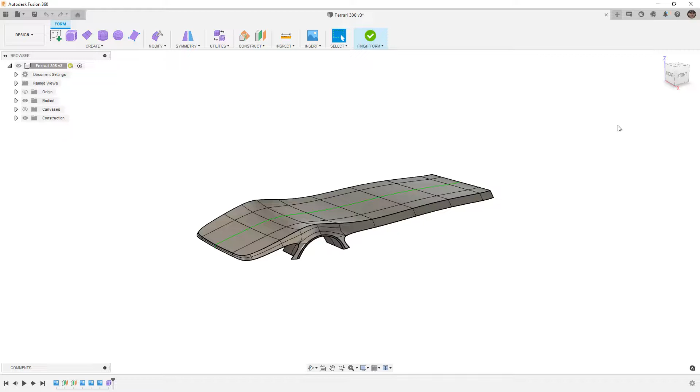What we're going to do is continue to build out the front quarter panel. So we want to connect the bottom edge that we have here and begin moving it forward, and we want to do the same and begin working our way backward. So the way that I'm going to do this is I'm going to start by selecting this edge, and we can consider a couple different things. We can try to bridge these two edges together, or we can begin extruding and pulling this out and manually controlling the shape. Either option is fine.

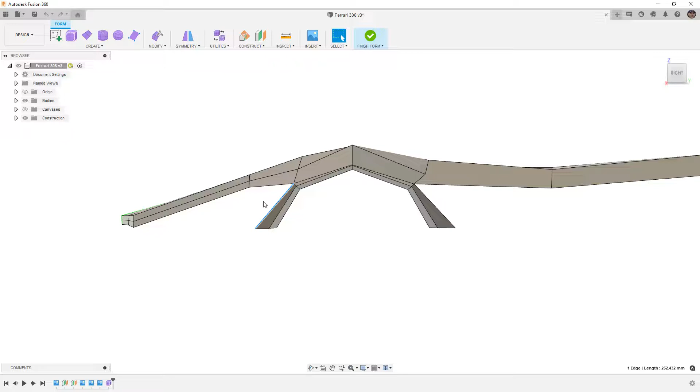When I'm modeling something like this, again, I try to stay in box display mode, and I try to work manually. It's not always the fastest method, but I like to use things like extruding these edges to manually control where they're going to go. So I'm going to bring the canvas back. I'm going to hold down Alt because I want to have a smooth transition. And then I want to take this lower vertex and pull it back.

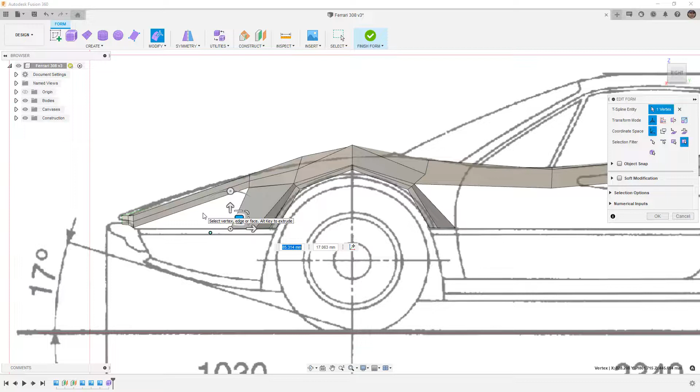What I'm doing is I'm slowly taking the angle of this edge and I'm transitioning it to be more vertical. I don't want to carry that sort of weird tweaked square shape or that polygon. I want to try to get more to four-sided consistent patches. So now that I have this one here, I have to decide whether or not this section is going to be a triangle or if this section is somehow going to be a four-sided patch and carry along the front. Because we know four-sided patches are ideal, I'm going to try to do that.

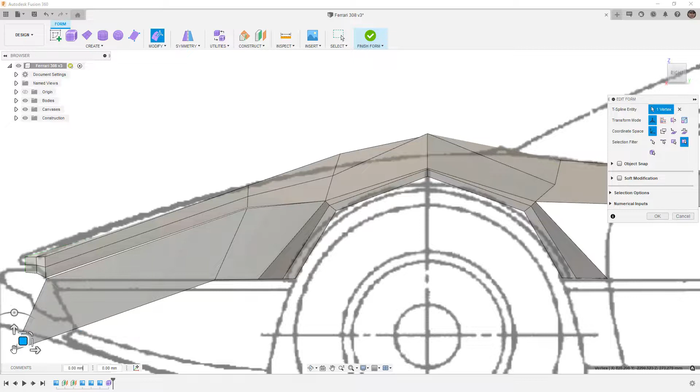So I'm going to just carry this one down. And again, I'm going to take this vertex and sort of bring it up, keeping in mind that we have crossed this midline, but we're going to move some stuff in a little bit. Now that I have that created, I'm going to go to Weld Vertices, and I'm going to put these two together, which automatically merges that edge for me. Then I'm going to do the same thing here.

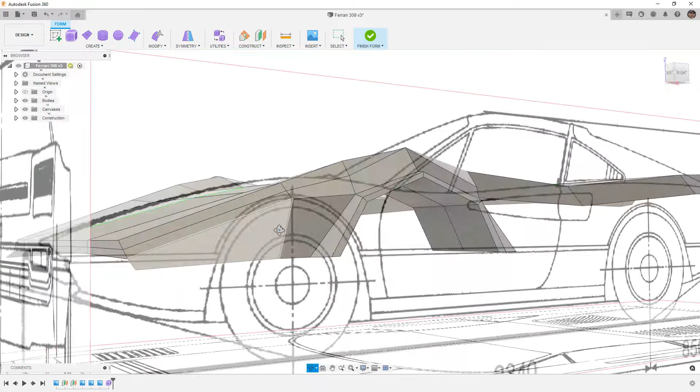So now that I've sort of put those together, let's go into Smooth Display and just see what it looks like. I'm going to hide my canvases, and I want to take a look at the shape. When we look at it from the front, this corner is obviously sort of flared out, but the actual shape of the fender, the transition, looks pretty good. So the next thing that I want to do is go back to box display, and I want to carry this section over to the middle.

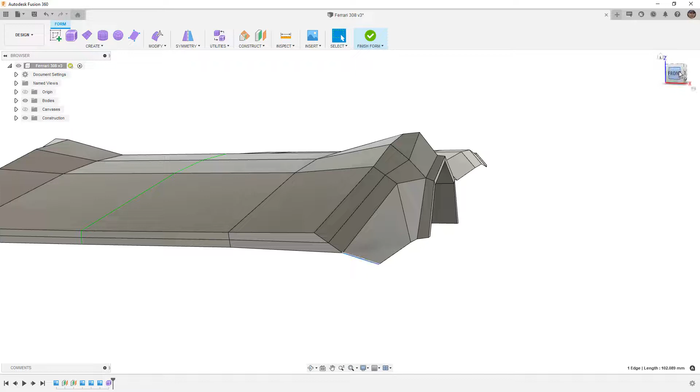Remember when we're working in the form tools in Fusion 360, it doesn't necessarily mean that we have to do everything in here. Now, honestly, doing everything in here is more complicated than it's worth. There are tools in the surfacing environment that are a little bit easier. So I'm going to just sort of move some of these vertices around from the front. Again, just looking for a consistent patch. Keeping in mind that this edge being sort of tweaked out like that is not what I want.

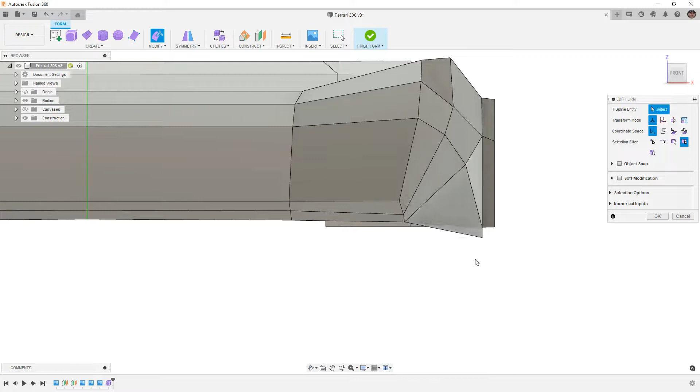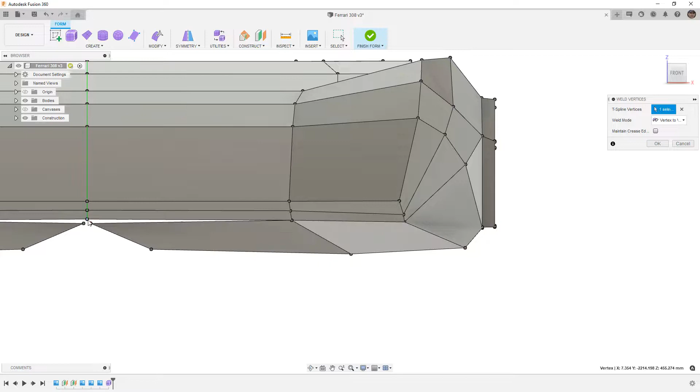So I'm going to bring this over. And then before I really do too much, I'm going to bring this one down a little bit. And I'm going to use Alt, and I'm going to begin just extruding it out. I'm going to let go of Alt and do it one more time and bring that over. So obviously some changes have to be made, but let's go ahead and go to Weld Vertices and let's just put some of these together. So I'm going to go from here to here. It's going to merge those two, and then I can merge these two together across my mirror line. And I can go back to Modify and Edit Form.

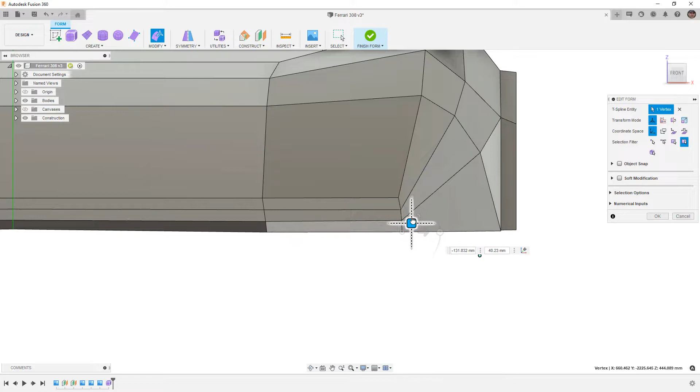As y'all are watching this, you also might wonder why I don't use hotkeys. Now, there are a lot of hotkeys that you can set up and that you can use in Fusion. Generally, I leave my menus exactly as they are default, and I try to avoid using hotkeys on topics where we're really doing a lot of explanation. And the reason for that is because I find it a lot harder to follow along when a lot of hotkeys are used. And when the hotkeys are used, a lot of beginner users or newer users lose sight of what they're actually trying to do.

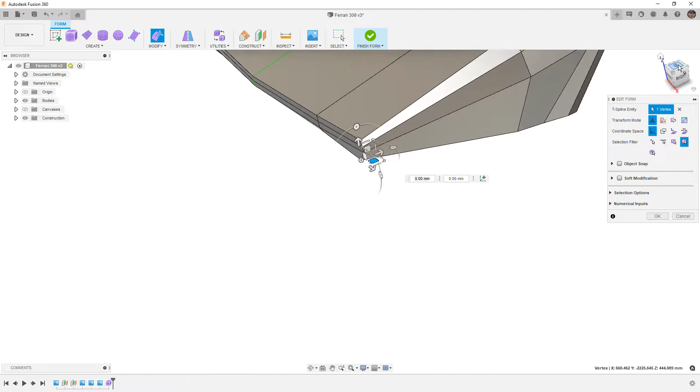So they end up trying to scramble to figure out what was pressed or what happened. And instead of actually figuring out what we're trying to learn, they spend more time just trying to figure out the interface. So sticking to a couple tools like Edit Form and Weld Vertices, and then really just focusing on where those are rather than spending a lot of time working on hotkeys.

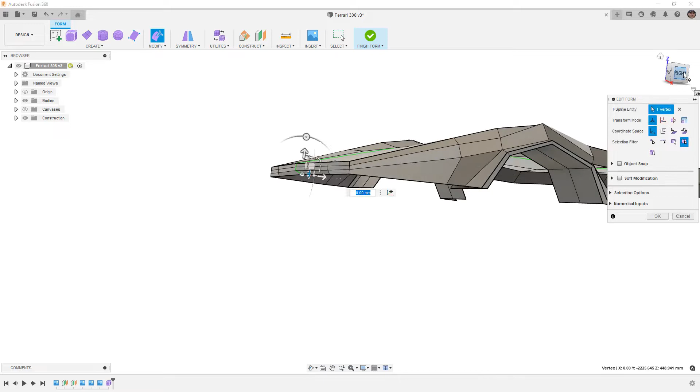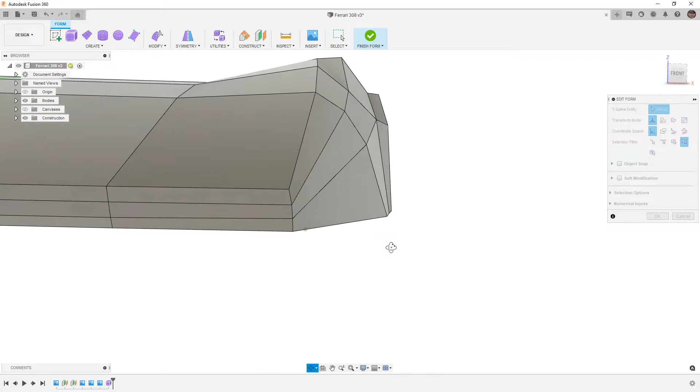And also, in my professional life, I produce videos and tutorials for the software companies. So a lot of times I'm required to keep things exactly as it is installed. So default install, with the exception of things like I can change how the mouse wheel and how the rotate works. But because of that, my 3D mouse is in a closet, and I tend to keep everything as default as installed. So a lot of people do like to use quick keys, especially on other softwares, but at least for Fusion, I'm going to just stick with all the defaults.

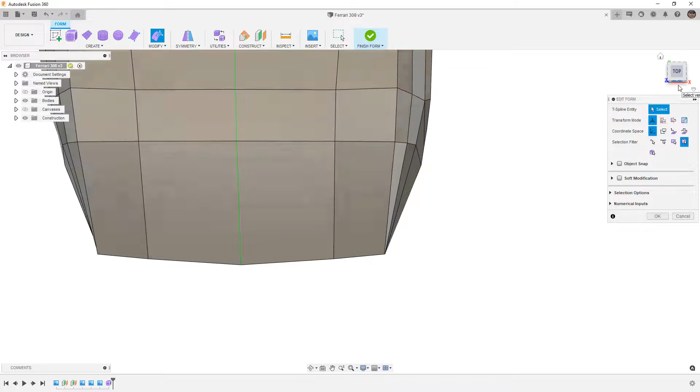So as I was mentioning, I was still kind of tweaking everything, and sort of the general plan is to make sure that everything is nice and consistent. And I don't really like how many edges are here up front. It makes it a little bit more difficult to control the curvature. We can potentially create some T-points here, but for right now, I think it looks okay.

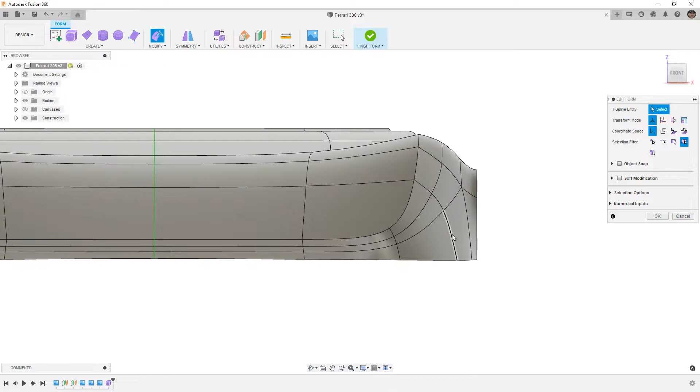And when we go into a smooth display, what we're really looking at is whether or not we're capturing the shape of the Ferrari. So from the front, that looks pretty good. And we managed to keep four-sided patches. Now, there is a topic that does come up when you're doing this type of modeling, and that's figuring out the direction of these patches and how that's going to control the shape that you're working on.

So obviously, we started in the middle and we simply worked our way back. That was a defining characteristic of the car. And we have our fender, which is a wheel arch or an opening for the wheel, and that is a defining characteristic. And blending those two together is often the biggest challenge that you'll have when you're trying to model a car, because you have to go from the front of the car and wrap it around the side, and ideally you would carry the shape all the way back.

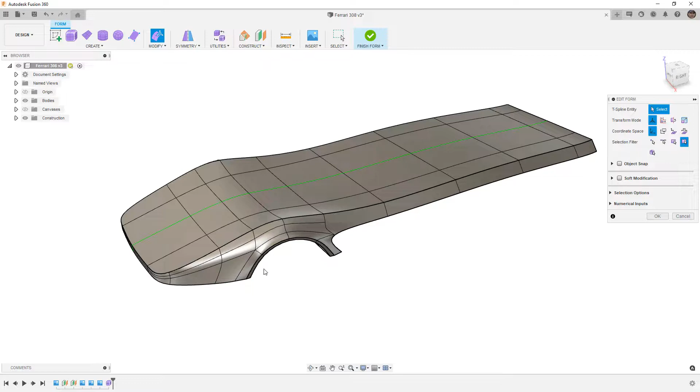Now, there is a modeling approach that we could use where we just make the underlying body shape and we make the fender well shape, and then using our surfacing tools combine them together. And honestly, that would give us probably a closer representation to the car. But the point of this is to learn the Fusion form tools. It's not to get necessarily the best result, but to learn how to use the tools. So I'm sort of designing myself into a corner by doing it this way, but I think it's important for people to learn.

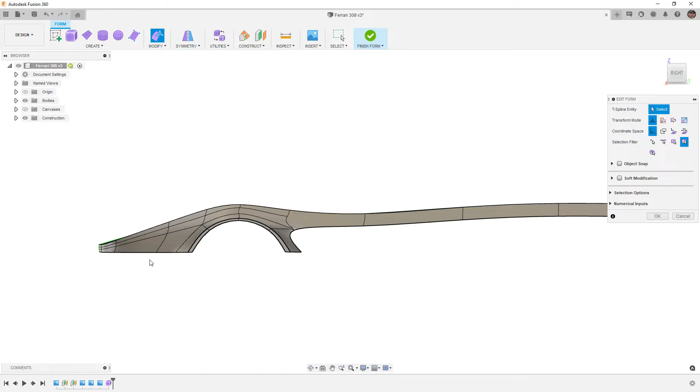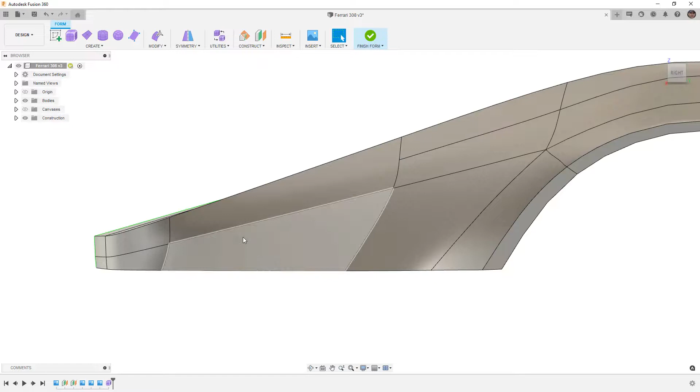Now, as we're looking at the control up here, as I mentioned, it's too many edges. We don't want to control that many. Because we really need the control for the fender just right here, I can likely get rid of these edges. I can select them and hit delete. And because of that T-point, the surface underneath is still pretty good. So it gives me enough control where I don't really have to worry about multiple edges competing for curvature.

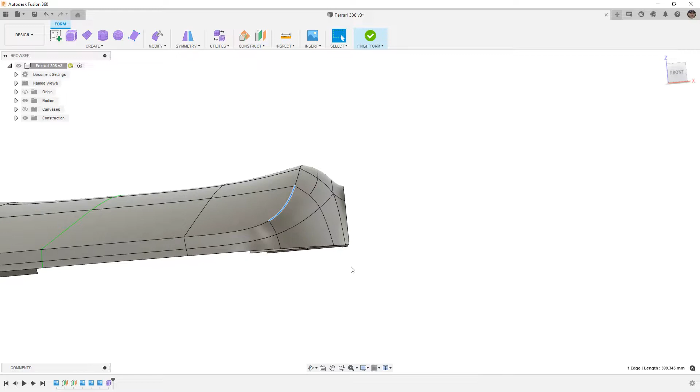Now, as soon as I uncrease that edge, all bets are off, because then the surface up top is going to start pulling, and that surface likely is going to get a whole lot worse. But for right now, if we turn off the edges, the surface quality there with that T-point is really good, and the transition of the fender flare is pretty good.

So I want to be mindful. I want to try to make shorter videos. So I'm not going to carry on modeling too much here, but I do want to focus a little bit more on the fender flare. And the way that this flares on the actual car is down here at the bottom, it pretty much disappears, but there's a very apparent flare up here.

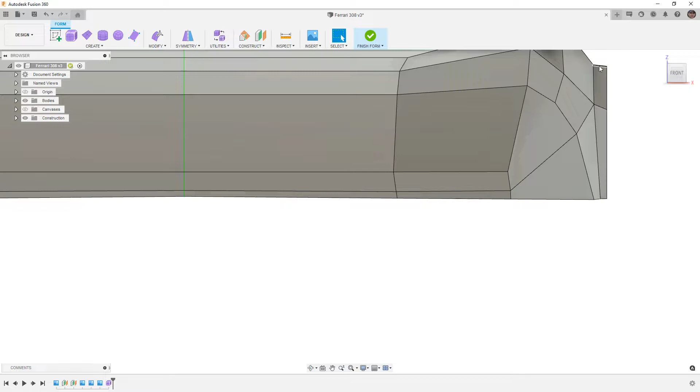And the way for us to make that happen is to take a look at the vertex location and try to make this a straight line. And we can do this manually, or we can try to use a tool. So in Modify, we've got the Straighten tool. We can select these three vertices and make a straight line between them, and that'll help us blend that out.

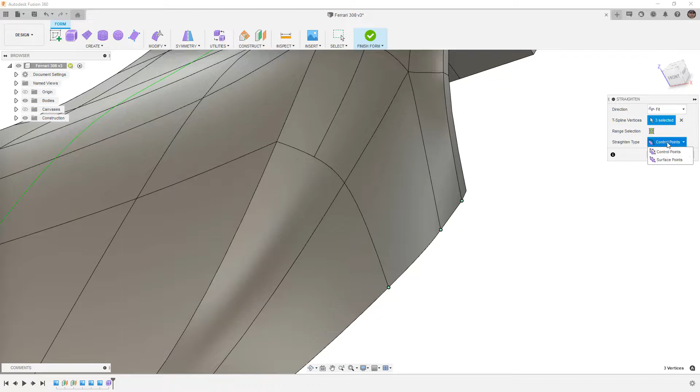Now, it's important to note that we're straightening the control points. And if we take a look at the smooth display, those are going to be the surface points. So there is a difference there between control points and surface points. So make sure that you are using the correct one.

Another thing to mention, and I'm going to repeat that tool using my right-click marking menu, is you'll notice that we have these handles here. Now, these handles are only going to show up on open edges or edges with creases. So you can see here where we've got our crease, we've got these handles. These actually will allow us to manipulate the direction of curvature. So it's kind of a tricky topic, and it's something that's a bit more advanced. And I don't really want to get too much into it.

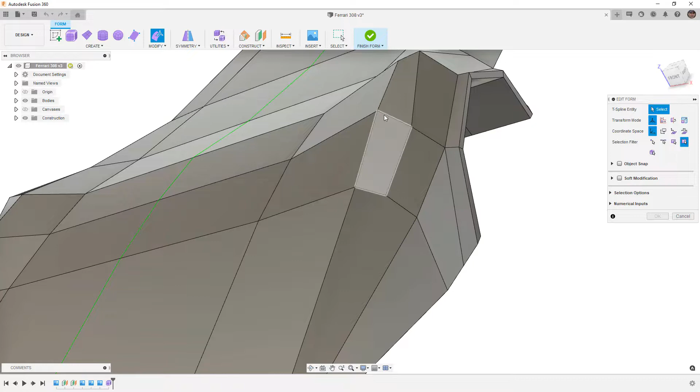But just note that if you see those handles pop up, if you're modifying an edge or a vertex, then if you modify these, so for example, if I pull this out, what I'm actually doing in the smooth display is I'm changing the direction of curvature. So if I use Control Z and bring that back, you can see that's the direction the fender wants to go.

But if I move it up in smooth display, we're not going to see it in box display, but if I move it up in smooth display, I can get pretty close to tangent with that, even though I have a creased edge here. Now, one thing you'll notice after you select that is this link tangent handle pops up. If we click on that, it'll go back to tangent, which means that the curvature that is controlling the shape of this fender is going to start influencing where that handle is.

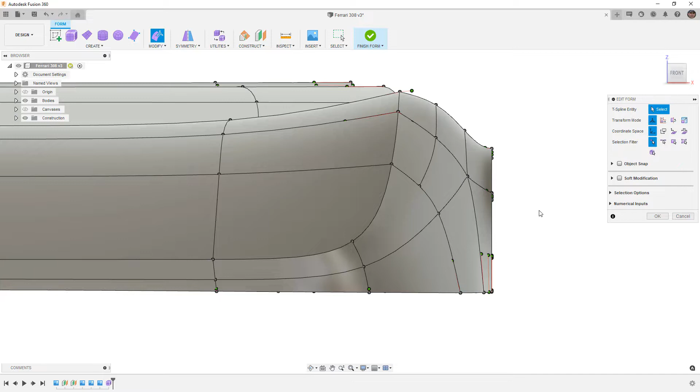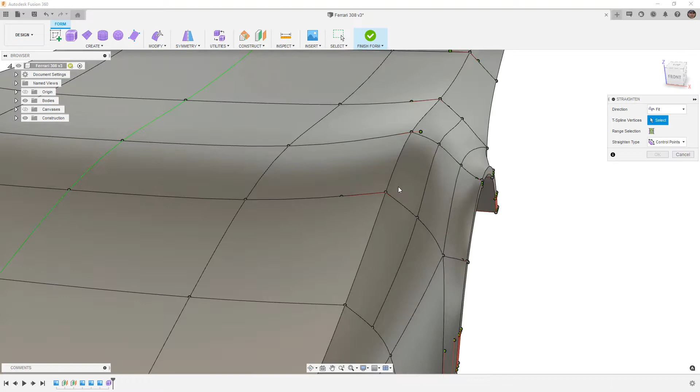So it's just something that you need to be aware of, and it really only shows up if you're on vertex selection. If you use the all selection, you won't see it there. And if you're on face or edge, you won't see it either. So it does pop up a couple times for things like straighten. It can be very handy for straighten if you go into that tool and you want to straighten this vertex, this one, and then the little point on the end. Sometimes it's hiding behind the surface. It can be hard to find. But sometimes you can use straighten to actually help control the curvature, even though we have a crease there.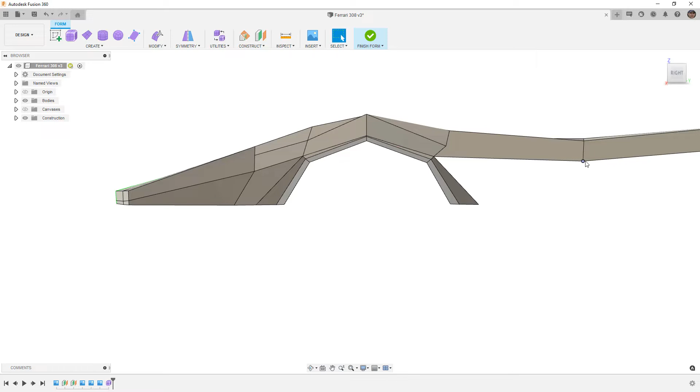So again, that's the reason that I wanted to mention that and try to talk about how to blend the fender flare out. And before we go, let's make just a few more modifications. I really want to carry this edge to the back here. So I'm going to use Modify Edit Form again, hold down Alt, bring it back, and I'm going to pull this one back. If we want to, we can show the canvas again to try to stick to that body line.

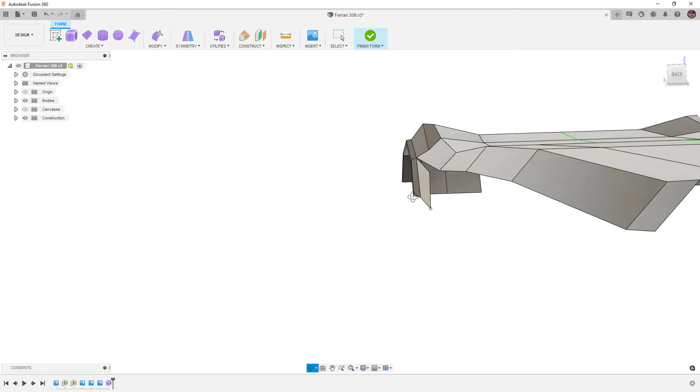And really what I'm trying to do here when I pull these edges out is I want to make sure that, one, they're in the right direction. So I'm pulling it back. I'm always using either a single direction or a planar. And then when I use things like Modify Weld Vertices, I select the one I want to move first and the one I want to go to second to pull that in. So now if we go to our smooth display, we're beginning to carry that smooth body line back.

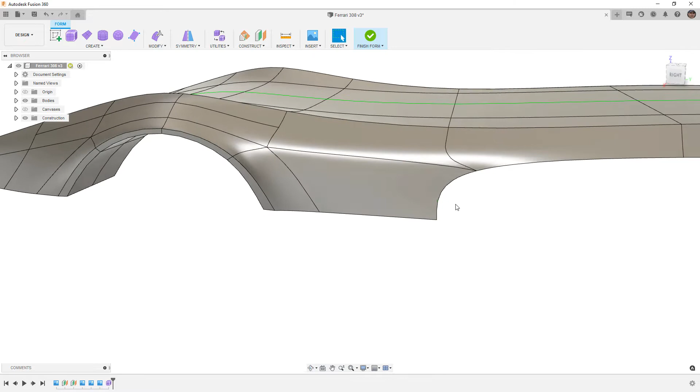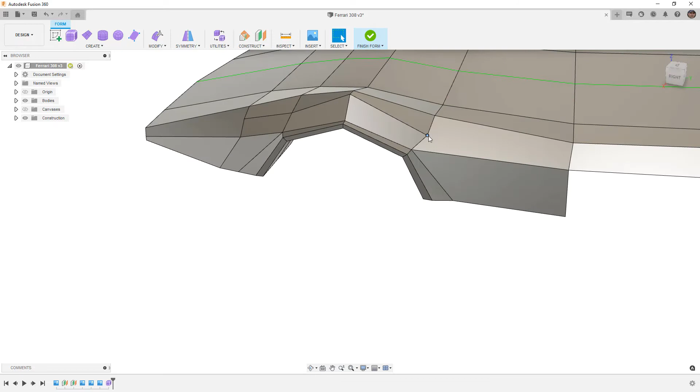And again, you can kind of see there's almost a little bit of a crease here, and that's just happening based on the amount of control we have. When we look at this in box display, this is a big face, and we're not really introducing a lot of control here. And if we don't need it, that's better. The surface quality will be so much better. So it's a good time to play around with that and figure out how to make these patches.

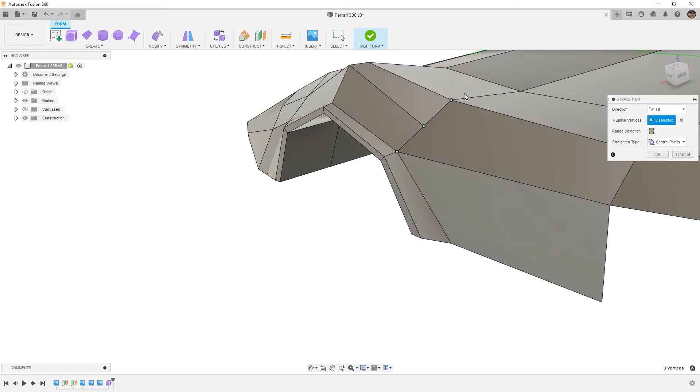I don't like the way that this edge is intersecting this fender here. So this is a case where I might come back and use straighten between these three vertices to pull that up. And I always want to make sure I look at it in smooth display. But that's a case where I might use that straighten to pull those three vertices into a straight line, which means that the quality of this surface, if I leave it a T-point here, is going to be much better.

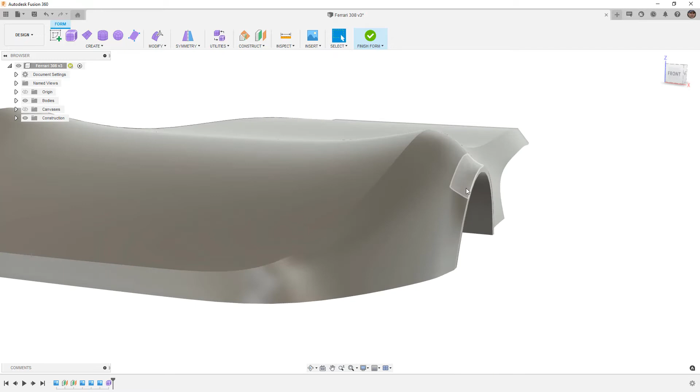So now that we've gotten that done, let's go ahead and stand back, go to our smooth display, and take a look at what we've done so far. So again, Control or Command 4 to get rid of those edges. And that looks pretty good. You can see that the fender flare sort of fades away at the bottom, like we would expect, but it's pretty pronounced at the top. And that's what you would expect to see.

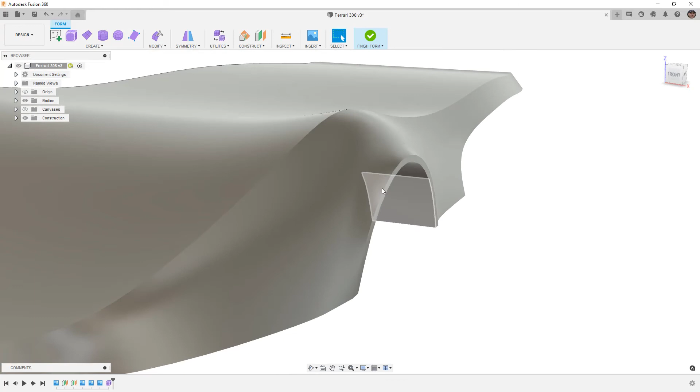Now on the actual car, that crease right there is more apparent. It doesn't blend in as smooth as we have it here, but in order to do that, we would either need to add a crease and a fillet, or we would need to add additional edges. The good thing is that we've got some control here, but to make it work how it does on the car, we would need a triangular patch here. So for now, for the general body shape, I'm going to leave it as is, but that's a detail we can always come back to later.

But for right now, let's go ahead and make sure that we save this and save often before we move on.